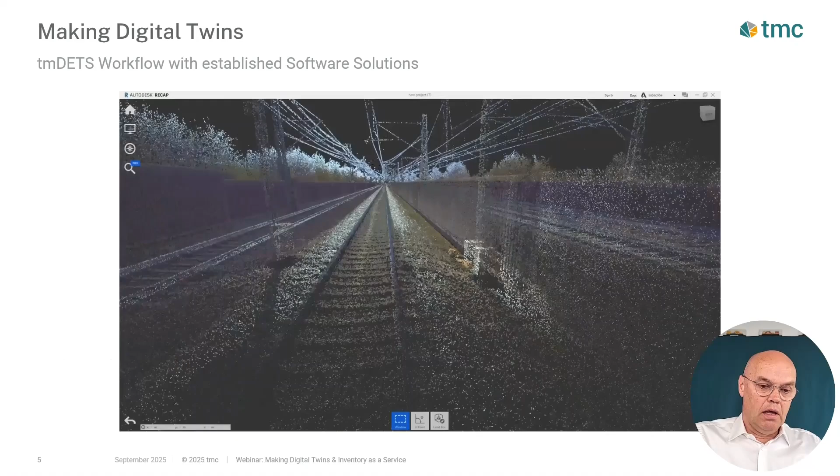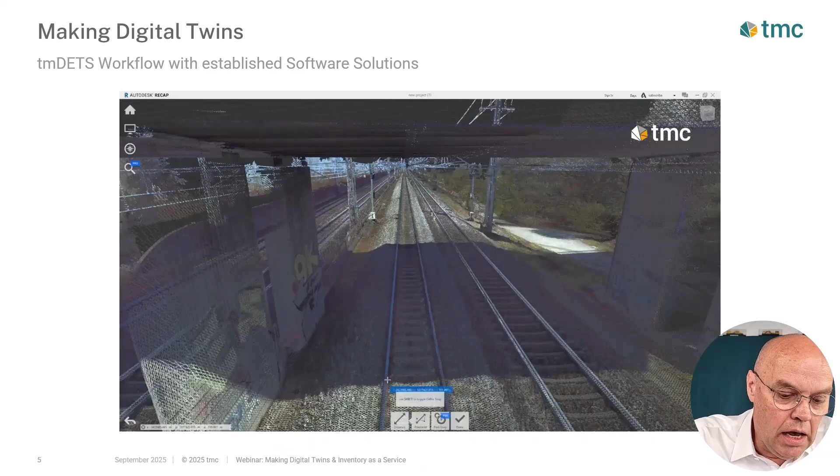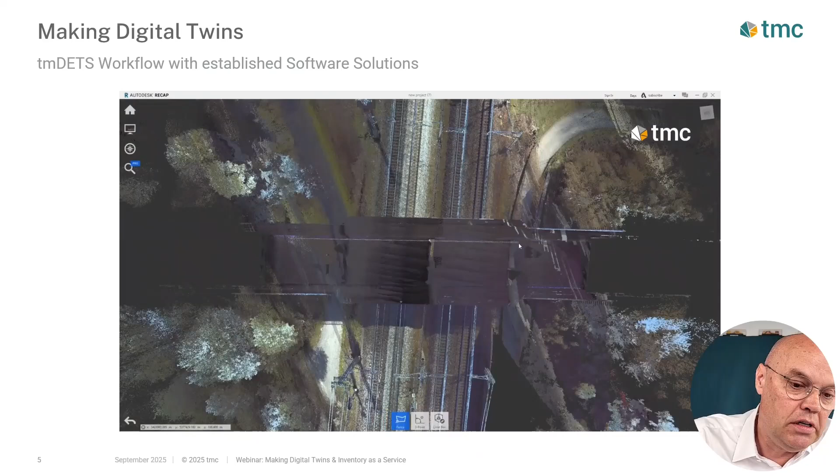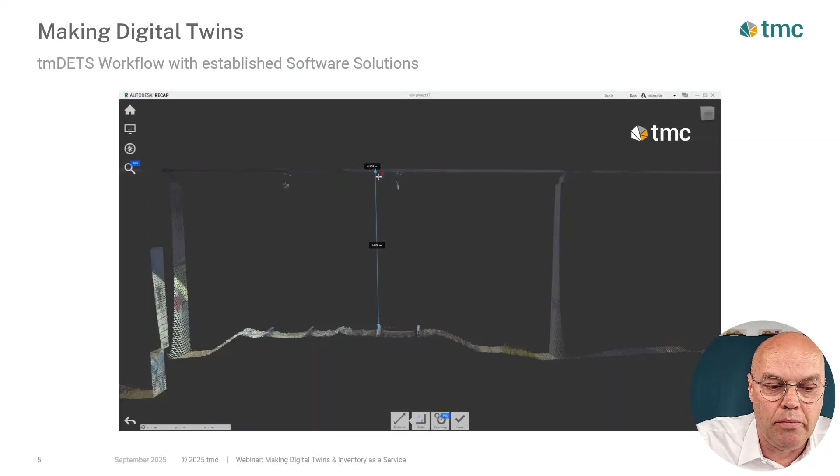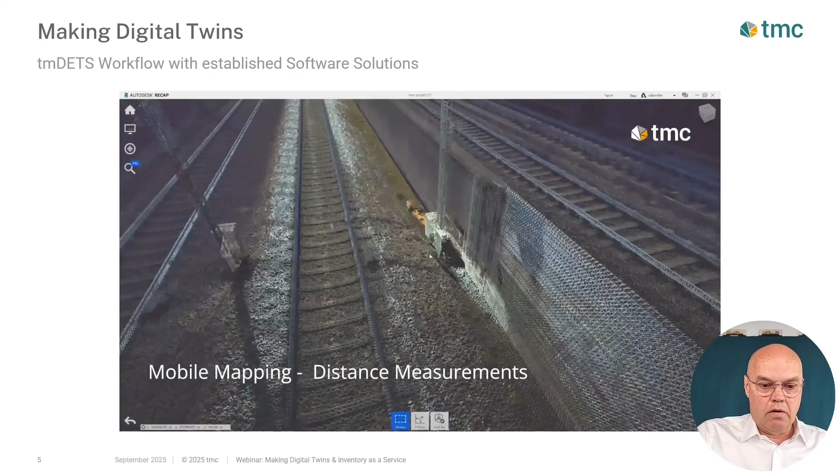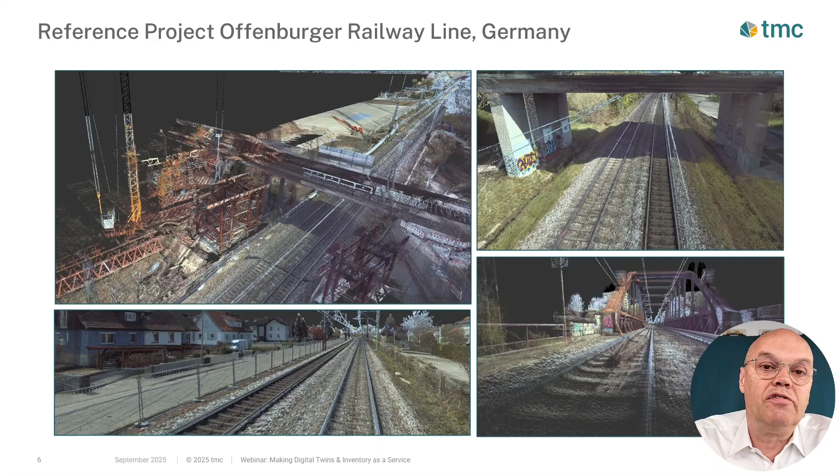Look to the objects which are along and in the track. I will continue with further results or images from our point cloud. Here you see some images of a point cloud from the project at the Offenburger railway line. This is a project we have done jointly with our partner Obermayr Infrastructure in Germany. Or this, another project - this is the Riedbahn railway line in Germany. This project we have implemented in the second half of 2024, together with our partner Obermayr.

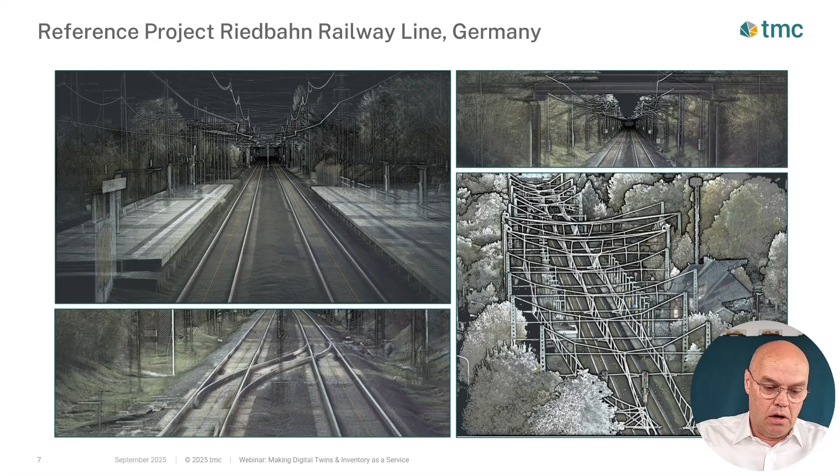So let's have a look at how we produce or generate these results. First of all, let's look at the principle, and this is as follows. First, there is the automated track surveying with digital systems, which provides a highly accurate absolute track axis. With our mobile mapping system, we merge the captured LiDAR and RGB data with the digitalized surveying data. The result is the point cloud, which we merge with the absolute track axis, giving us a colorized high precision point cloud. All this we do with our application, the Digital Environment Twin Service, so-called tmDETS.

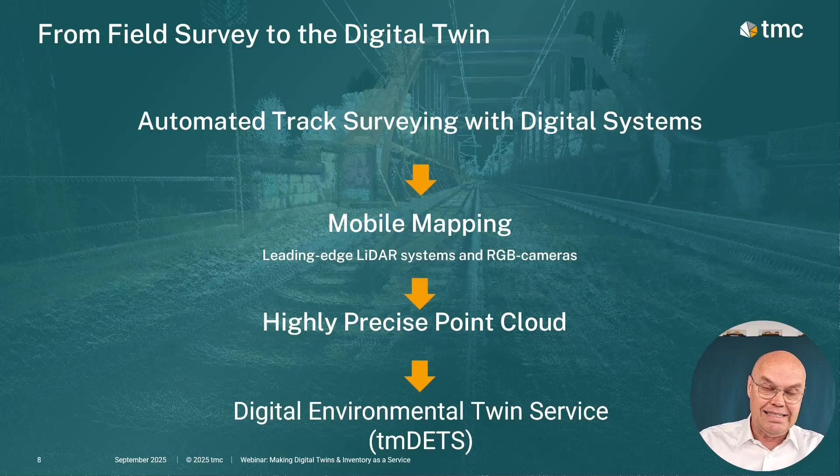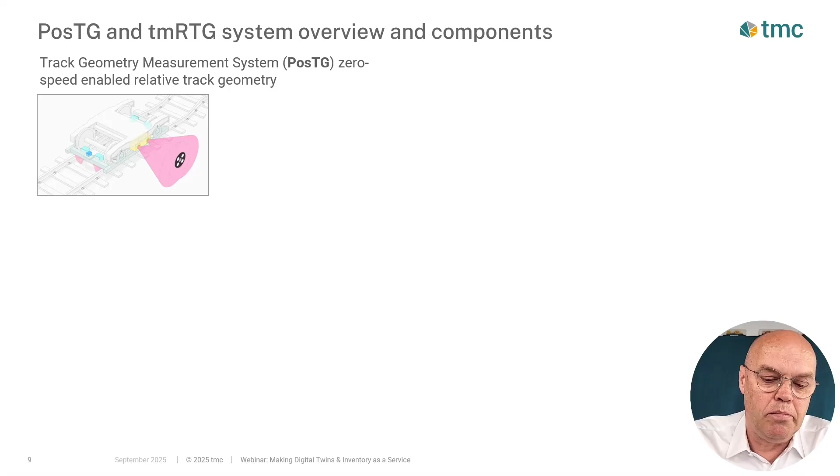Let's have a closer look at this system, its components and the process. The track geometry system, the POS-TG, is an inertial navigation system which allows for the measurement of the relative position of the track. And there is the tmRTG, TMC's reference track geometry system, which allows for the measurement of the reference points alongside the track.

This is a system combining a stereo camera, which you see here in the upper picture, integrated in the measuring vehicle, and the track side reference point. The reference points must be equipped with special designed markers, as you see here in the lower picture, which allow for reliable detection. This system provides the offset between the reference points and the rail and the track axis for the horizontal and vertical component. Here you see a small image film where you see the vehicle with the stereo camera system, and then the recognition of the markers or reference points.

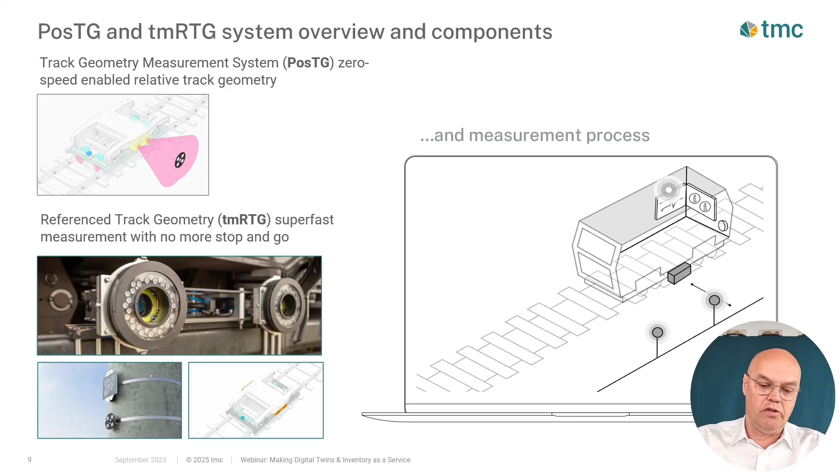Finally, there is the tmATG. The determination of the absolute position of the track axis is realized by combination of these two systems, the reference point system and the track geometry system - the tmRTG and the POS-TG. This will be done in a multiple step process. The coordinates of the reference points are used for the correction and localization of the track axis.

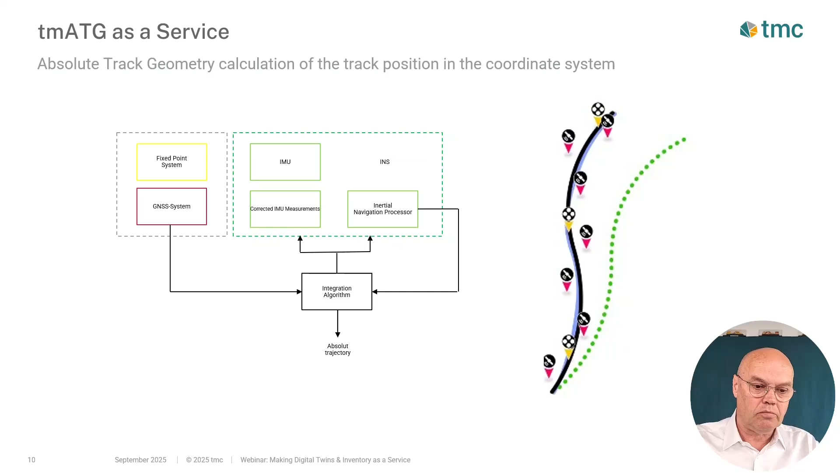Let's move on with TMC's mobile mapping system, or the components of it. There are two measuring vehicles available, fully equipped with calibrated measurement systems and the mobile mapping system, the Riegl VMX system, which consists of an IMU, an inertial measurement unit, a global navigation satellite system, 3 LiDAR systems, and 2 color camera systems.

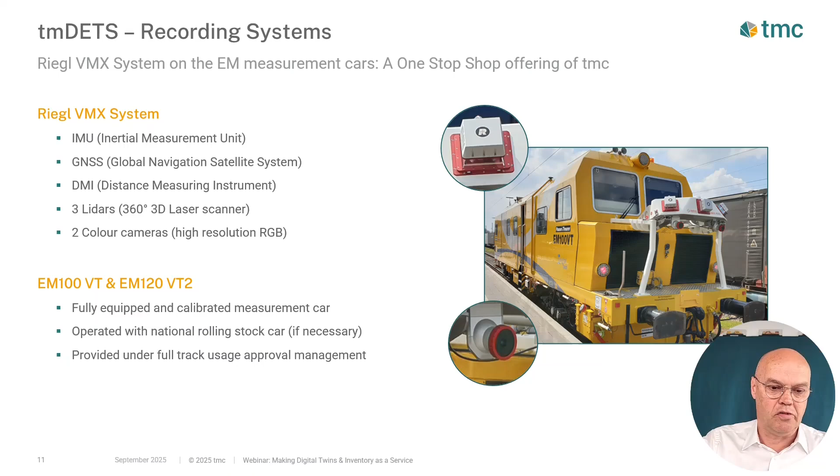This results in a digital full service process, starting with a track survey using a measurement car with its measuring equipment. In the back office, there is generation of the high precision point cloud and AI-based data analytics, resulting in a categorized high precision point cloud inventory, which we provide as a service in a geodata package. Furthermore, we can update drawings and provide log reports showing the differences from old drawings to the updated ones.

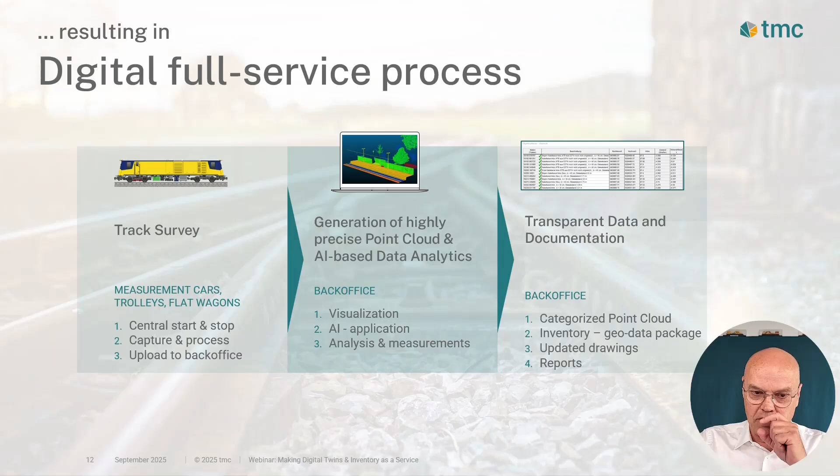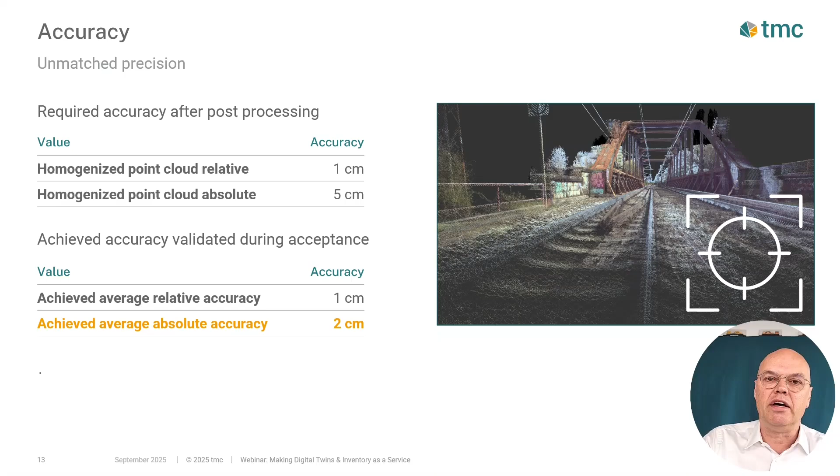Let's move on with accuracy and productivity. The accuracy requirement for the homogenized point cloud was a relative accuracy of 1 centimeter and 5 centimeters. Our systems were tested and accepted with the accuracy we achieved: a relative accuracy of 1 centimeter and an absolute accuracy of 2 centimeters. This is how accurate we provide our point cloud.

Now let's move on with how effective and efficient our systems are - it's about productivity and cost optimization. Already the initial measurement is more cost efficient than conventional manual methodologies. If you compare the initial measurement with our digitized or automated measurement, you have already a cost advantage.

Then there is no need anymore for track closure. There are no costs related to this because there are no track closures. Our measuring on our surveys with a measuring vehicle, we will do always without any interference of the conventional traffic operation.

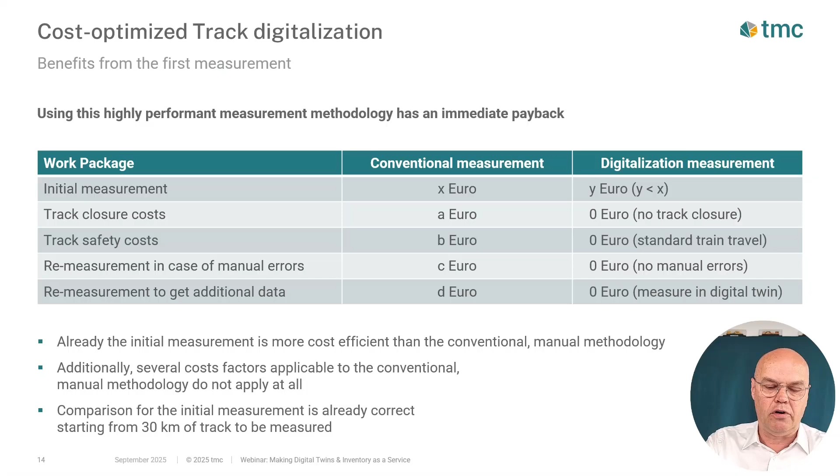And because of this, there are no people in the track. There are no related track safety costs for safety guards and safety people to protect or guide the workers. In case remeasurements are needed, you have the data available in the point cloud in the office, so you can redo it 24 hours, 7 days, in the office - there's no need for any manual remeasurements. These are the effort advantages and cost advantages of our system compared to the conventional way.

Let's move on to the second topic of our webinar: our digitized inventory as a service. Here you see an overview of the process. On the upper left corner is what I explained before - this is our data recording and data preparation to provide a point cloud.

With our inventory as a service, we do an automated object classification with AI-based software and also conventional algorithms. Additional assignments of attributes for each object can be done afterwards or included in this process. This data can then be transferred to a designated system of the customer, resulting in an inventory database, a digital database, a geo package, which we provide here.

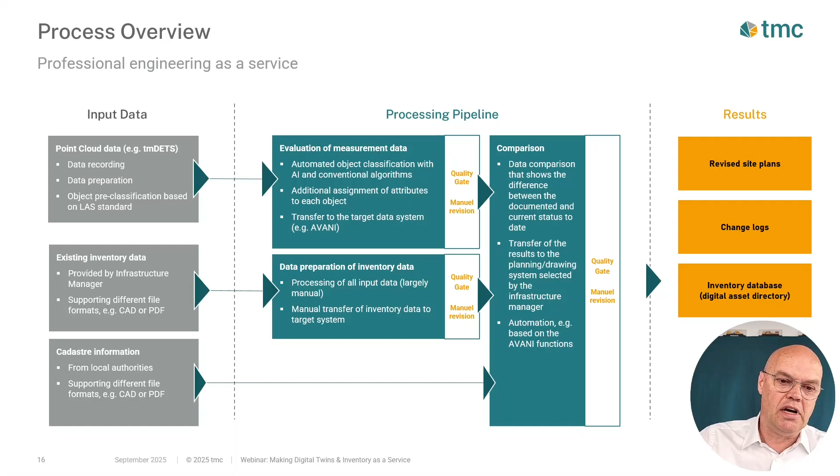On top of this, very often you get drawings, CAD drawings, from the infrastructure manager in an old status. What we do is process these data, compare these drawings with the actual inventory list which has been digitized and updated. Out of this comparison, we update the drawings, and also provide a deviation log. These are the results out of this inventory service.

The applied methods are the following: first, there is a video-based track capture by the RGB cameras, using a so-called YOLO model, which recognizes several objects based on AI. For example, in this picture, there are signals - far away, but the system already recognized it, marked with a yellow square.

In parallel, there is a laser-based track capture model, where in the 3D point cloud, objects are already categorized through the process and classified. Using our AI, we recognize more than 35 object classes - small dimension objects, mast signals, something like this. What is in progress now is recognizing linear objects as well with our AI, for example noise protections, cable trays, and something like that.

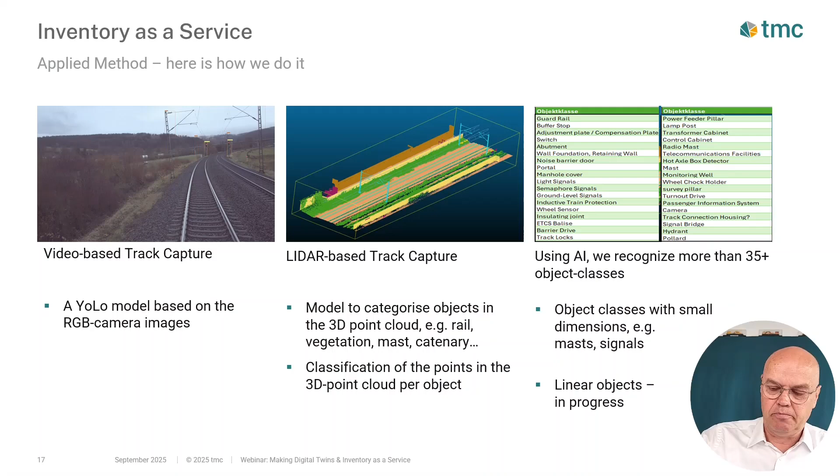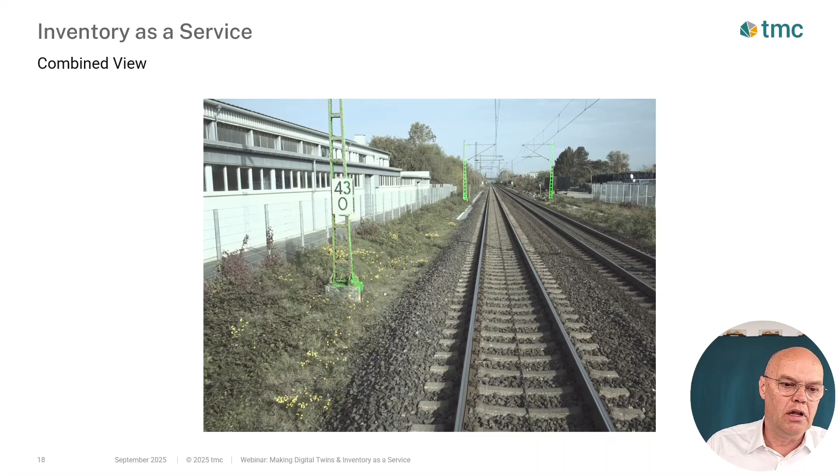Here you see a combined view as it is in the AI algorithm. The object classes in this case are the overhead catenary masts, and here you have the combination of the RGB image and the point cloud. You see the overlapping points in green on these masts.

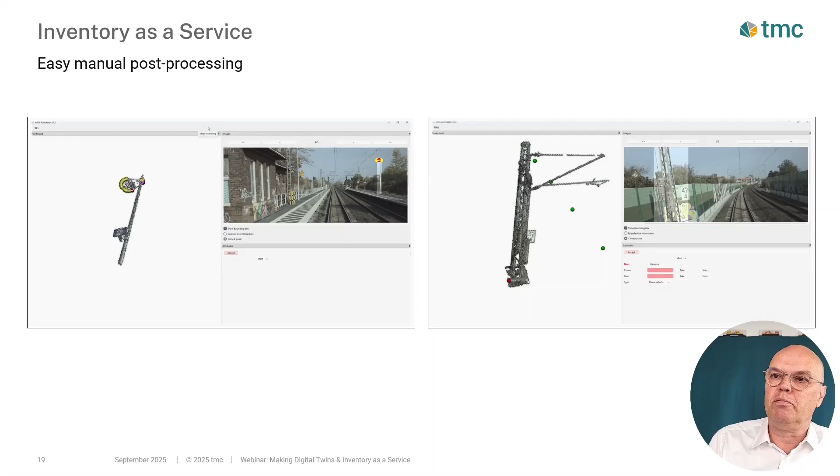What you can also do after this process is manual post-processing to give more attributes to the recognized objects. Here you see, for example, a lamp mast. Your interest might be the top of the lamp itself, so you set a point that will be georeferenced. Or in the next picture, you're interested in the area of the surface of the foundation, so you set points, measure this, and it can be added to the attributes of the object. So you get more and more a full picture, depending on what you're interested in.

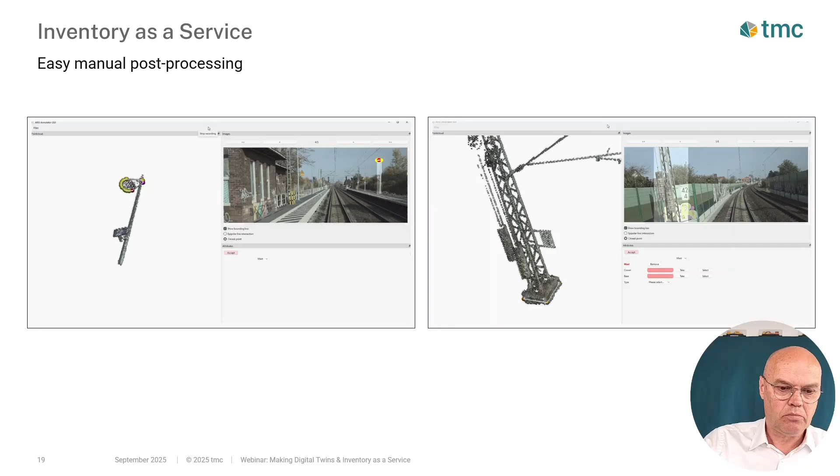Finally, I'll give you an overview of the whole process, how it works. First, on the left corner, you see already far away these signal masts, and the AI recognized the signal mast in the RGB image. As a blue square, you come closer and it's confirmed. Then out of this, there is an automatic extraction of the individual object as a point cloud, and this results in a list, in a geo package with certain attributes.

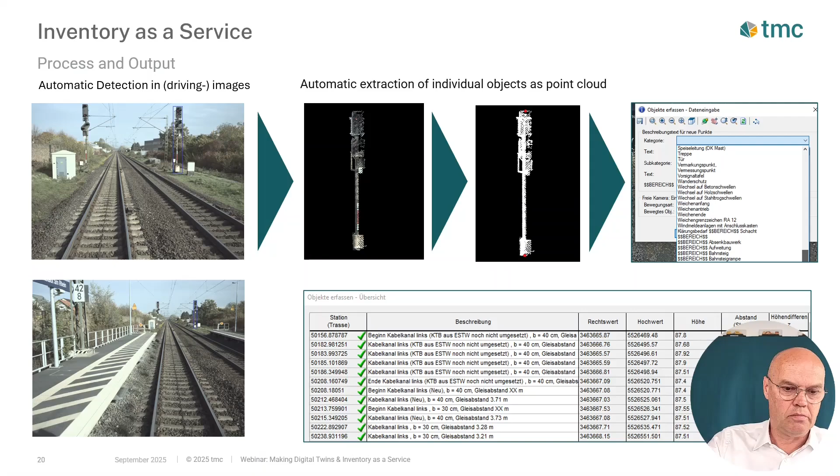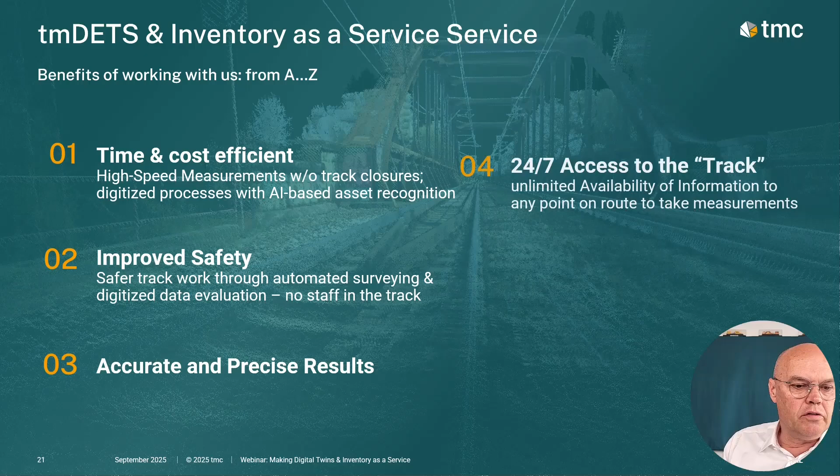Let me summarize the benefits of our digital twin service and inventory as a service. This is time and cost efficient compared to conventional methods. There is high-speed measurement with the vehicle and without any track closures. The digitized process with AI-based asset recognition also saves costs and effort.

Overall, there is improved safety for track workers—safer track work through automated surveying and digitized data evaluation. There is no staff anymore in the track. The results are accurate, precise, and updated. You have 24/7 access to the track because of the point cloud that is in your system.

There's unlimited availability of information to any point en route to take measurements, and you have an up-to-date digital inventory. This is provided by a digital asset directory. Finally, what we provide are revised site plans and design documents, detailed change logs, and deviation reports.